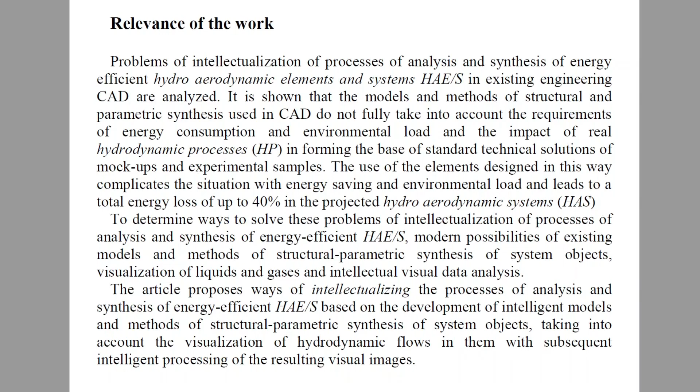The aim of the work is to create models, methods, and intelligent information technology for analysis and synthesis of energy-efficient hydroaerodynamic elements and systems to reduce their energy consumption and impact on the environment. To achieve this goal, the following tasks are solved. The problems of intellectualization of the processes of analysis and synthesis of energy-efficient hydroaerodynamic elements and systems are analyzed, and the ways of their solution are determined.

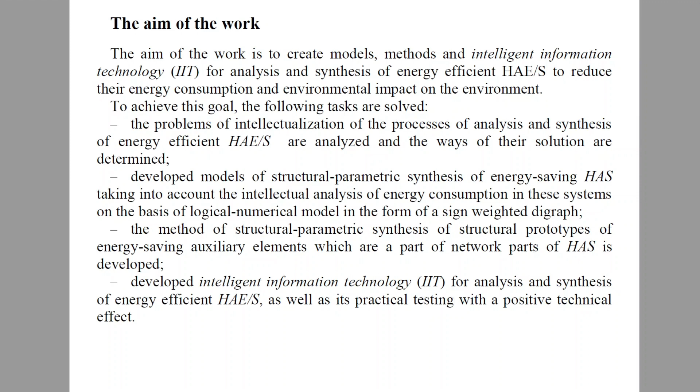Develop models of structural parametric synthesis of energy-saving hydroaerodynamic systems, taking into account the intellectual analysis of energy consumption in these systems on the basis of a logical numerical model in the form of a sign-weighted digraph. The method of structural parametric synthesis of structural prototypes of energy-saving auxiliary elements which are a part of network parts of hydroaerodynamic systems is developed. Developed intelligent information technology for analysis and synthesis of energy-efficient hydroaerodynamic elements and systems, as well as its practical testing with a positive technical effect.

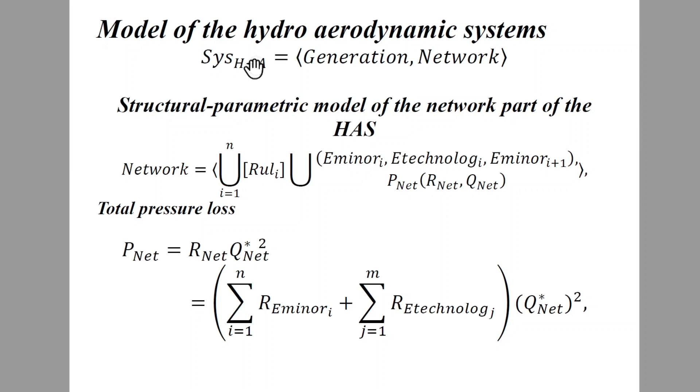Here you can see a model of a hydroaerodynamic system which consists of generation and network. A structural and parametric model of the network part of the hydroaerodynamic system you can see here, and the next is a total pressure loss. The generation part of the hydroaerodynamic system is here, and efficiency of the main energy active element.

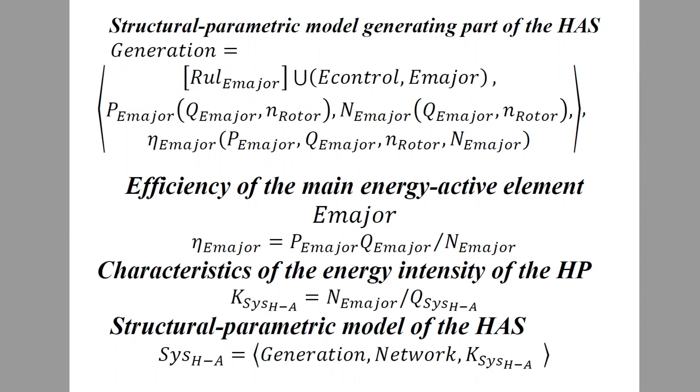Next step, we take characteristics of energy intensity of the hydrodynamic process, and here we have a structural parametric model of hydroaerodynamic system. Next step, you can see the logical numerical model for generating technical proposals, sign-weighted oriented graph, and general view of the sign-weighted graph and matrix of the values of the weights of its arcs.

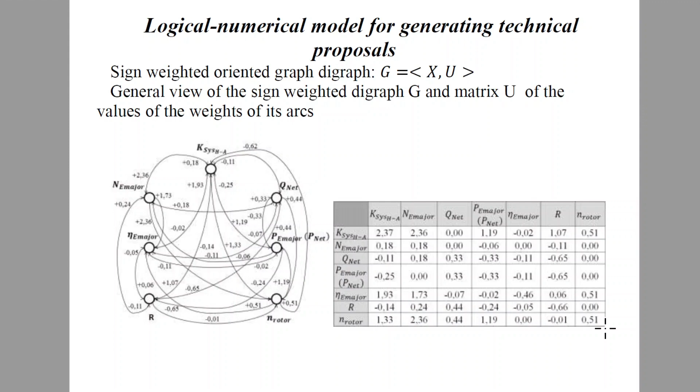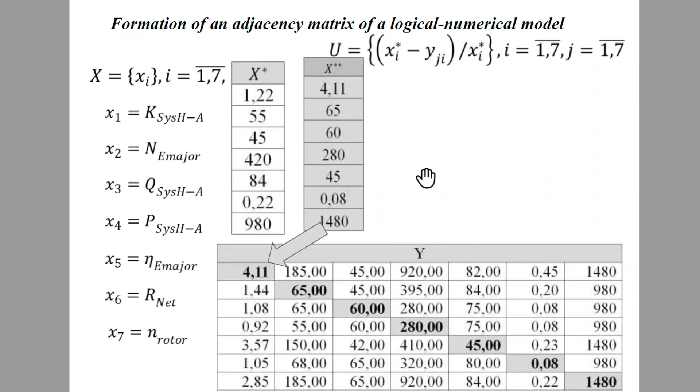Here you can see formation of an adjacency matrix of a logical numerical model. And the results of modeling a technical proposal to increase the productivity of hydroaerodynamic system by reducing resistance of elements of the network part.

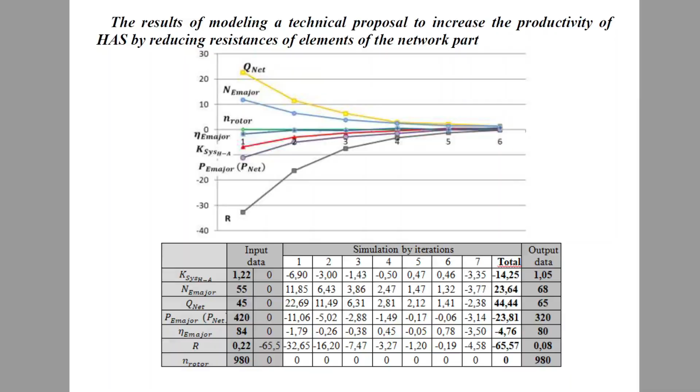When developing the method of structural parametric synthesis of energy-saving prototypes of auxiliary elements, it is established that structural elements with unreasonably high values of hydroaerodynamic resistance are used in the design of the hydroaerodynamic system network part, which in turn leads to increased total pressure losses in the network part. To reduce them, it is necessary to obtain quantitative and qualitative assessments of the state of hydrodynamic processes in the designed auxiliary elements, which allows to determine the causes of high resistance and automate the synthesis of technical solutions for their reduction.

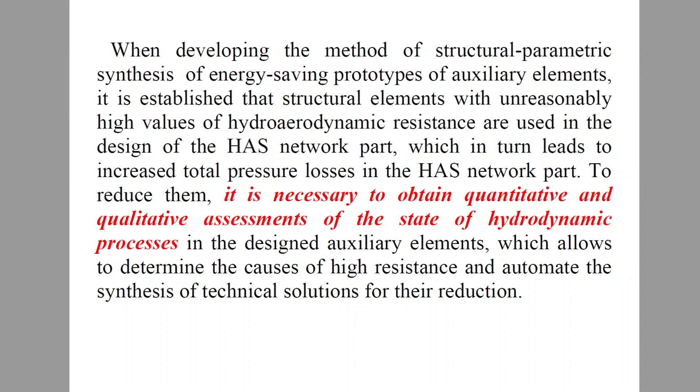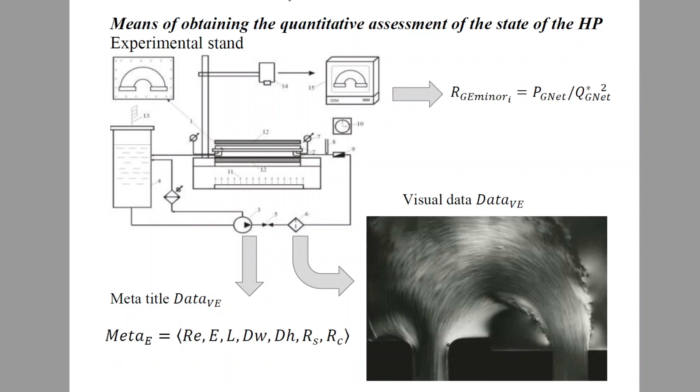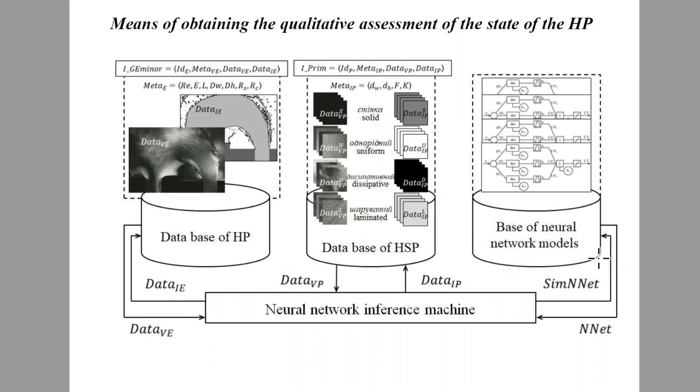Means of obtaining the quantitative assessment of the state of the hydrodynamic process in experimental stand, individual data, means of obtaining the qualitative assessment of the state of the hydrodynamic process, database of hydrodynamic processes, database of hydrodynamic primitives, and base of neural networks. Here you can see creation of hydrodynamic structure primitive database.

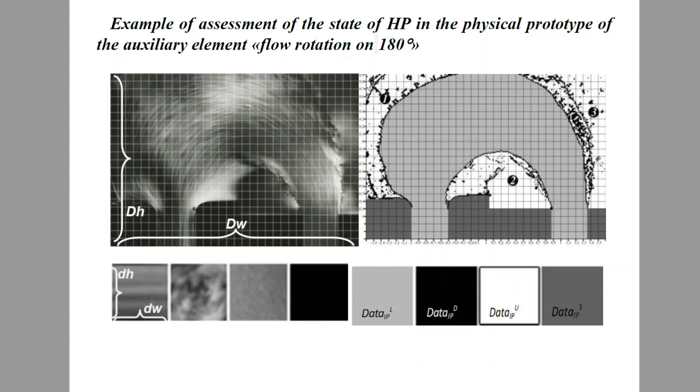This is the example of assessment of the state of hydrodynamic process in the physical prototype of an auxiliary element, flow rotation by 180 degrees. Here you can see the results of the stages of intellectual structural parametric synthesis of the physical prototype of the energy-saving auxiliary element, rotation of the flow by 180 degrees.

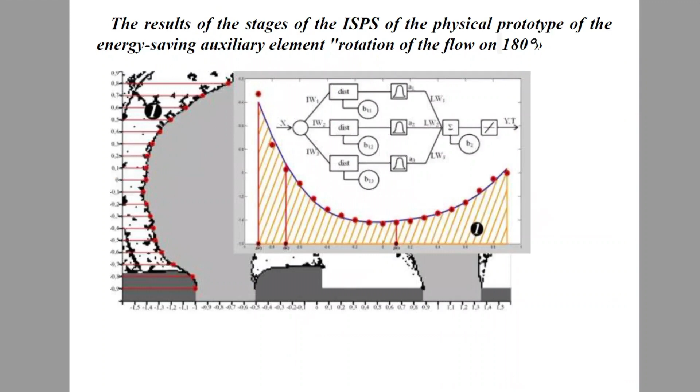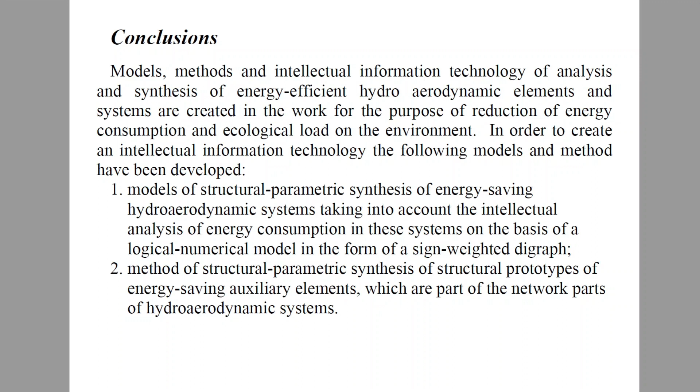In total, models, methods, and intellectual information technology of analysis and synthesis of energy-efficient hydroaerodynamic elements and systems are created in the work for the purpose of reduction of energy consumption and ecological load on the environment. In order to create an intellectual information technology, the following models and method have been developed: models of structural parametric synthesis of energy-saving hydroaerodynamic systems, taking into account the intellectual analysis of energy consumption in these systems on the basis of a logical numerical model in the form of a sign-weighted digraph, and the method of structural parametric synthesis of structural prototypes of energy-saving auxiliary elements which are part of the network parts of hydroaerodynamic systems. Thanks for watching.